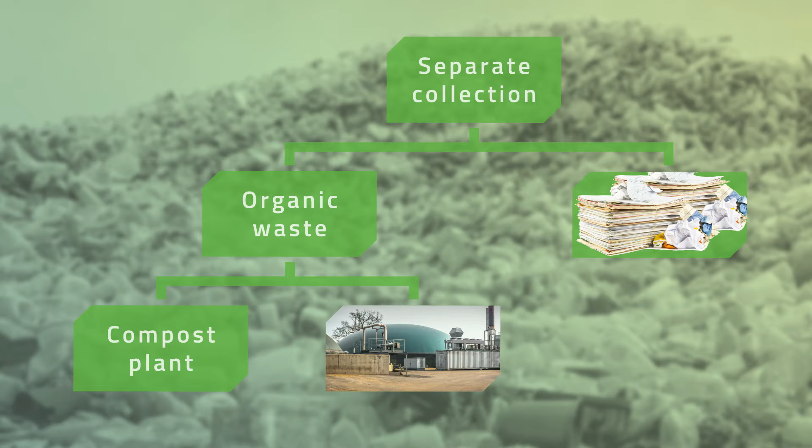If collected separately, there are 2 main streams: organic waste and paper. Separately collected organic waste can be treated in a composting plant or a biogas plant. In a composting plant, organic waste is treated aerobically, meaning with oxygen. The typical treatment duration is between 8 and 12 weeks. Outputs of the process are compost, which is a soil conditioner, carbon dioxide, and water.

In a biogas plant, organic waste is treated anaerobically, meaning without oxygen. The typical treatment duration is between 1 and 3 weeks. Outputs of the process are methane and carbon dioxide. Methane can be used for energy production. The remaining solid is treated like in a composting plant to produce compost. This will take about 6 to 8 weeks.

Separately collected paper typically ends up in a recycling plant. It can be used to produce either recycled paper or energy. If organic waste is collected mixed, such waste can be treated in a so-called mechanical biological treatment plant, MBT. The separation and treatment of biodegradable waste is done on site.

These plants are not designed to produce compost because high-quality compost cannot be obtained from such mixed waste. We call this CLO, compost-like output. Through the mixing, you have a lot of contaminants like heavy metals, glass and plastic parts, which are not good to have in compost.

Anyhow, the biological treatment in the MBT, which is a composting-like process, can stabilize the material. That means that its potential for leachate and gas production, as well as its quantity, are drastically reduced. After such treatment and the resulting stabilization, this material is safe for landfilling.

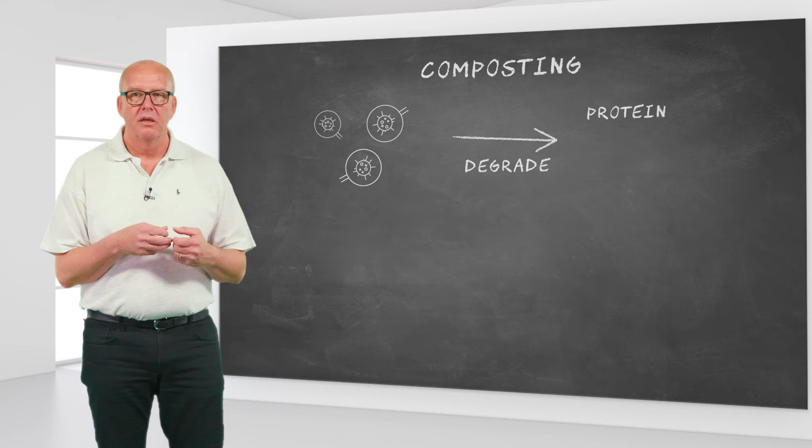Composting makes use of the natural process of biodegradation via microorganisms. These microorganisms degrade protein, carbohydrates and fat into carbon dioxide, water, humus and heat. But very importantly, they need oxygen to do so. From 100% organic waste, 30 to 40% compost remains on average.

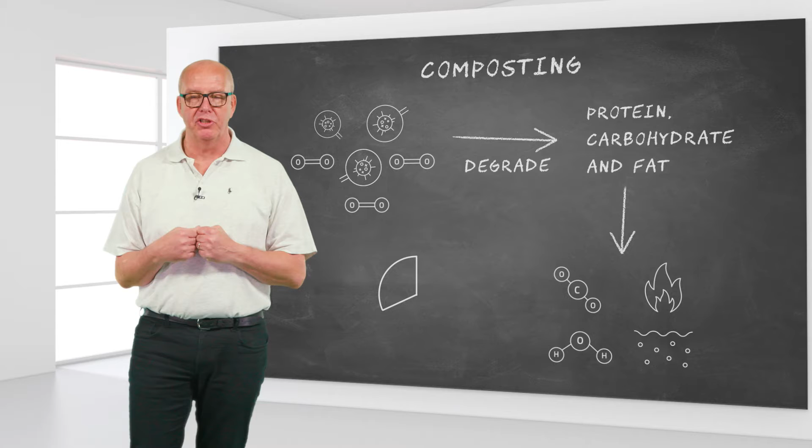Typically, the composting process consists of two phases. In the so-called intense phase, all easily degradable organic material is degraded. Microbiological activity is very high in this phase, which causes a temperature increase up to 70 degrees, quite hot. We call this effect self-heating. This phase typically lasts about 1 to 3 weeks and is followed by the maturation phase. It lasts about 8 to 10 weeks and temperatures drop to 20 to 40 degrees.

Let us take a closer look at the waste, what is suitable for this composting process. Sources of organic waste can include organic kitchen waste, like vegetable and fruit remains, potato peels, eggshells, coffee and tea grounds, tea bags, organic garden waste, like grass cuttings and leaves, trees and branches, roots, herbs and moss, parts of plants, flowers. Other sources include agricultural waste and waste from the food industry.

The basic requirement for selling compost is producing high-quality compost. To this end, you need to have pure material and avoid contamination with toxic and interfering materials like heavy metals. Compost quality is also defined by organic matter content, water content and nutrients like nitrogen, phosphorus and potassium. Hygienization of the compost must be mentioned here as well. Through self-heating, all dangerous components, such as bacteria, are killed.

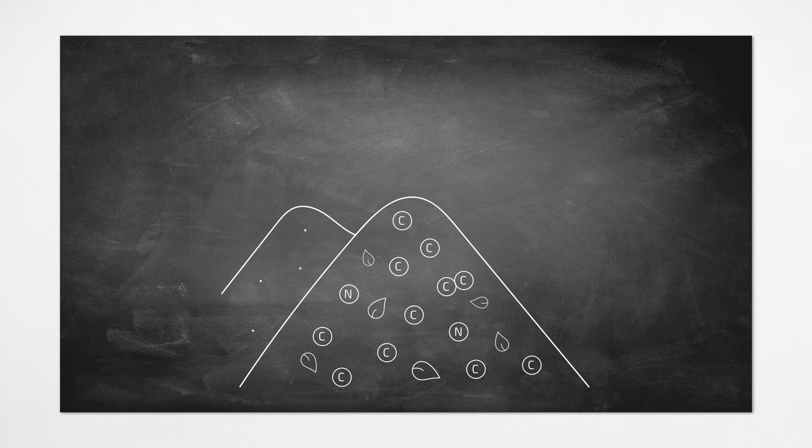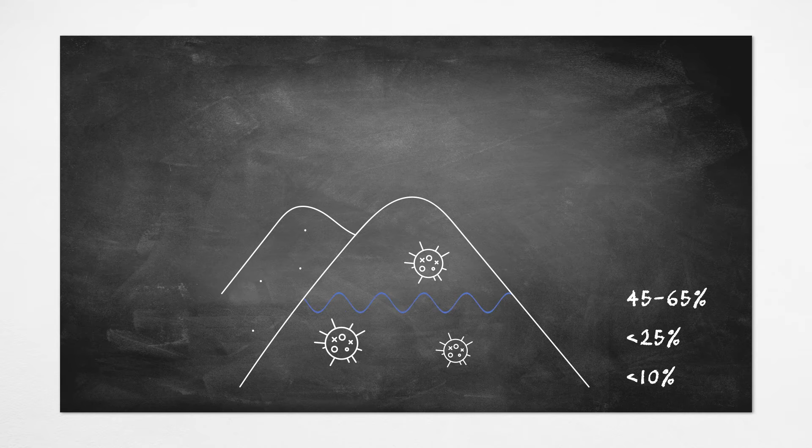In addition, you need sufficient structural material like branches in order to guarantee a good exchange of air inside the material to be treated. Please monitor the water content. It should be between 45 and 65%. If the water content is below 25%, microbiological activity slows down significantly. Activity ceases below 10%. If the water content is too low, it is necessary to add water. Protect the material against uncontrolled wetting or drying. A roof or a membrane covers the material and protects it from rain or sunshine.

In addition, it is important to maintain good aeration so that the microorganisms have sufficient oxygen all the time. Aeration also helps to dry the material, to avoid overheating and to remove carbon dioxide. Quite a few functions. We'd better take a closer look at this point. In principle, we distinguish between two types of aeration for the composting process: passive versus active aeration.

Through the self-heating of the microorganisms, the temperature inside the heap increases. The heated air rises and leaves the heap. It causes negative pressure inside the heap, and fresh air is sucked inside the heap as well. This mechanism is called passive or natural aeration. This explains why structural material is needed inside the heap. Such materials guarantee the required homogeneous airflow.

It is also possible to actively support aeration by means of pipes under the composting heap. Two options are available for this. The first is to blow air inside the heap. The other is to suck air out. One advantage of sucking out the air is the resulting reduced odor emissions. The composting procedure involves different phases. The components of a composting plant also depend on these phases.

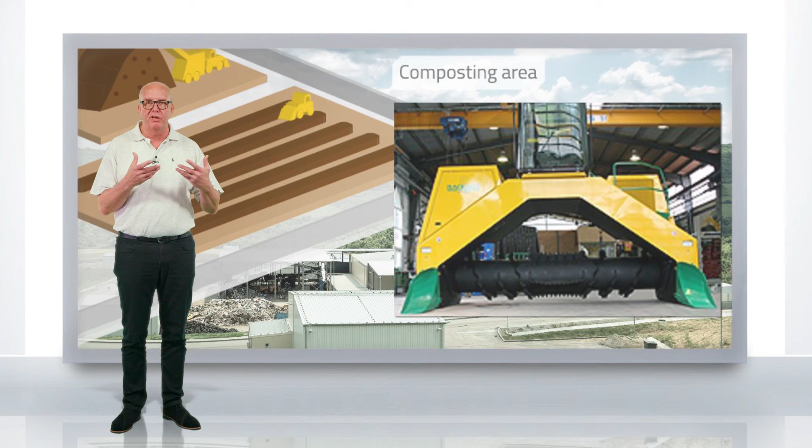In the intense phase, turning is required at least once per week. In the maturation stage, turning every 2 weeks might be sufficient. In systems with passive aeration, sufficient turning of the material is required in order to support aeration and to homogenize and mix the material. If active aeration is used, turning is not required as often as in natural aeration systems.

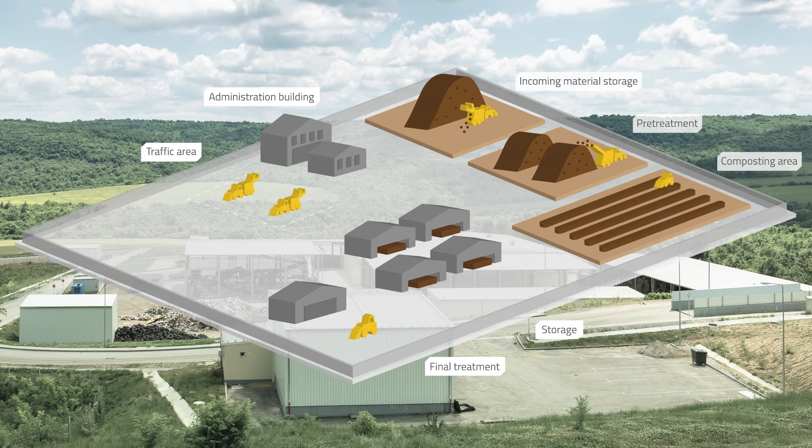What a nice smell! Let's get back to the overview of our plant. After the composting process, the material undergoes final treatment to sieve out unwished materials and to obtain different fraction sizes for various uses. Further components of a plant include a storage area, administration buildings for offices, etc., a traffic area, and, if necessary, a biofilter to reduce odor emissions.

Now, you might ask how much surface area you will require for a composting plant. The values depend on the capacity in tons. For example, I need a plant capacity of 5,000 tons per year. The surface area needed is between 0.8 and 2 square meters per ton and year.

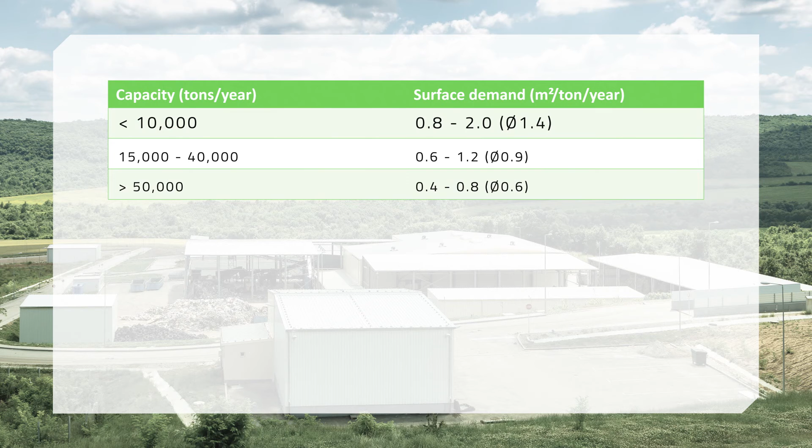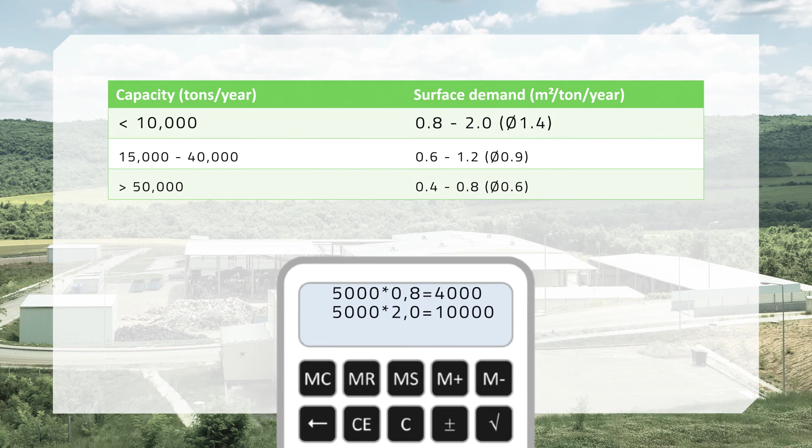The required size is between 4,000 and 10,000 square meters, depending on the type of composting technology chosen. For example, triangular windrows have a larger surface demand than trapezoid windrows. The average required size is about 7,000 square meters.

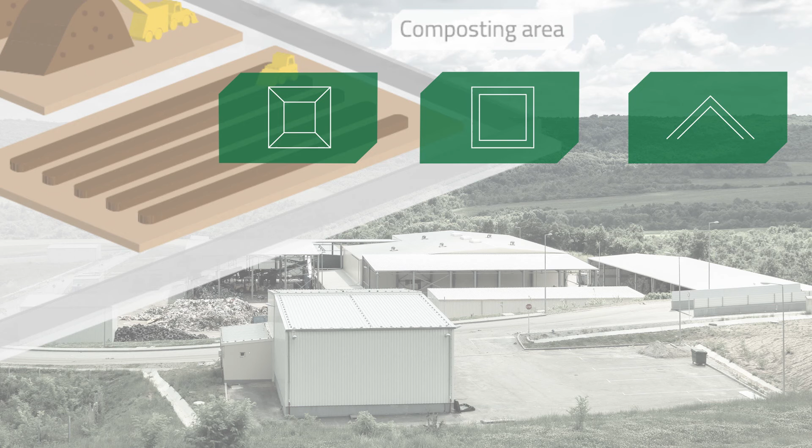In principle, we distinguish between 3 composting types: fully closed systems, indoor systems, and open or sheltered systems. Within these 3 types, we distinguish 3 procedures. First, there are static procedures in which the compost material is not moved during the whole process. Second, there are semi-dynamic procedures in which the compost material is moved at some point within the process, e.g. through the turning of windrows.

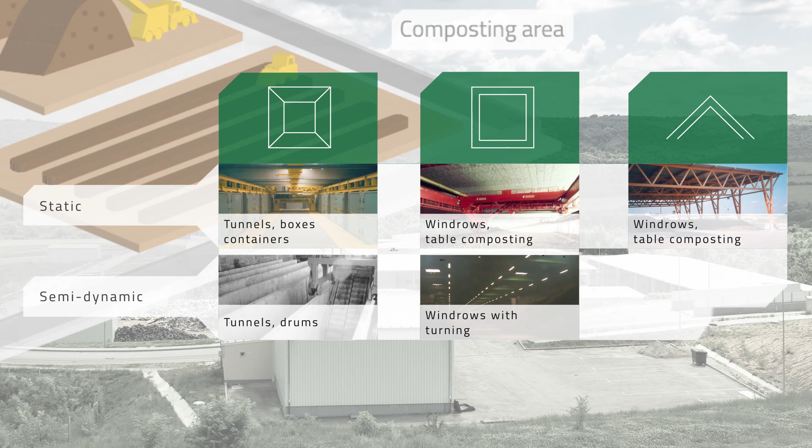And there are also dynamic procedures where the compost is moved continuously throughout the process. Depending on the substance and the process, the main decomposition requires only 1 day to 1 week. Afterwards, you proceed using static or semi-dynamic procedures.

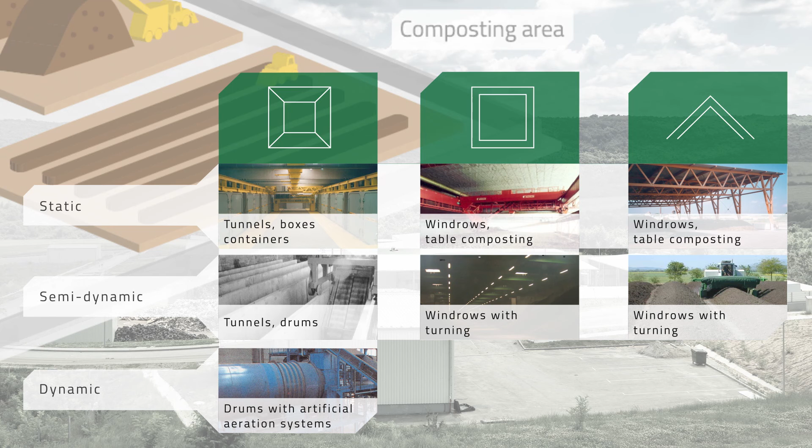What can you do with all this high-quality compost? Well, you can sell it to different consumers who need it for agriculture, gardens, public green spaces, wine or vegetable production, recultivation measures or forests. To work economically, a few aspects have to be considered.

The required amount and quality need to be checked in advance to make sure that the compost can be utilized. Also, possible selling prices for compost need to be checked, and maybe you have to adjust the plant's operation as a result. Another important aspect is the location of your plant. On the one hand, it shouldn't be too far away from potential consumers to avoid high transport costs. But some exclusion criteria apply for the site selection as well.

Remember that organic waste has a high risk of leachate emissions. Therefore, plants must not be located in protected areas, water reservoirs or flood zones. Also, plants might produce odor and noise. Avoid locating plants very close to or upwind from residential areas.

In conclusion, you can see that dumping waste together with other waste causes big environmental problems. By handling it separately, you can reduce the landfill volume and even generate profits from the waste, in our case, the compost. To improve the environment, you don't have a choice. Go for biological waste treatment. Go for compost. Thank you very much for your attention.